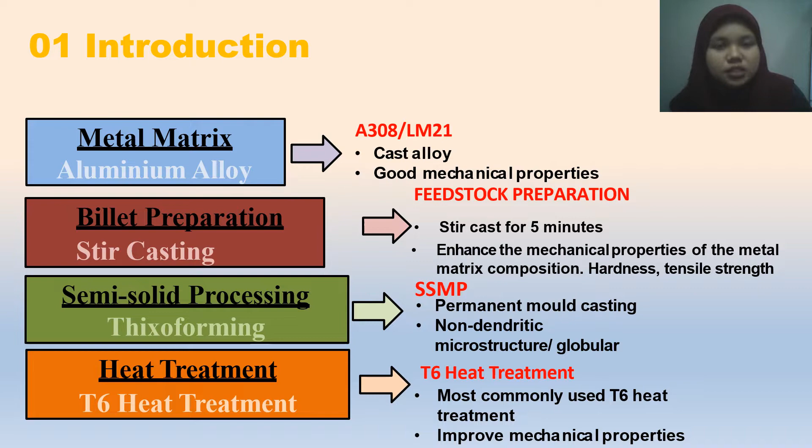There are three objectives for this project: firstly, to produce aluminium alloy for thixoforming using partial remelting; then to investigate the microstructural evolution of aluminium alloy after partial remelting; and next to determine the mechanical properties of thixoformed aluminium alloy. The scopes of this project are the stir casting technique, then thixoforming to obtain a non-dendritic microstructure, then T6 heat treatment, then microstructural analysis using a scanning electron microscope, and mechanical properties using Vickers hardness and a universal tensile machine.

The problem statements of this project are: less previous research on A308 because it is not a famous type for industrial use. Next, thixoforming is a relatively time-consuming and high energy process. And last but not least, the effect of T6 heat treatment on the aluminium matrix when it has undergone the thixoforming process.

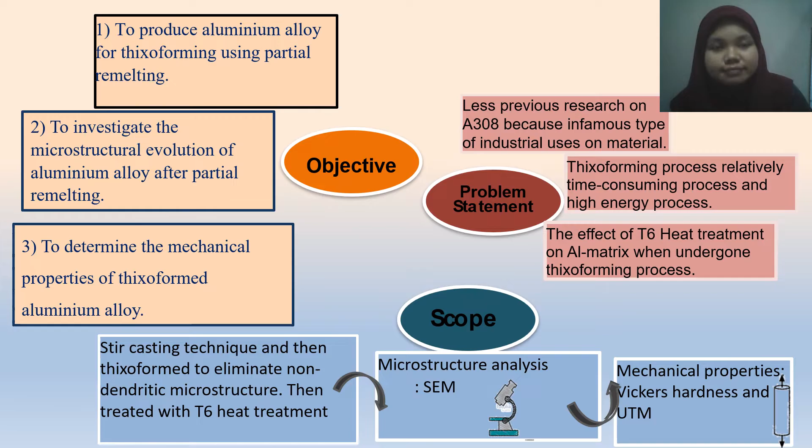For the review, A308 aluminium alloy was taken as an experimental alloy due to its availability and better castability. The A308 alloy has not been commercialized yet due to a lack of improvement in the mechanical properties. However, an effort has been made to control the microstructure along with improvement in metallurgical, physical and mechanical properties of A308 alloy by using horizontal mold vibration for automotive components. This was extracted from Patel et al.

2014. Next, stir casting is a method where reinforcement particulate is blended homogeneously into the aluminium matrix by mechanical stirring at high rotational speeds. After that, the molten metal is directly transferred to a shaped mold for solidification. Thixoforming improves the mechanical properties of A308, especially the yield strength and tensile elongation compared to permanent mold casting. Hardness increased due to extremely low porosity and fine size of the alpha aluminium grain throughout the sample. The ultimate tensile strength of the thixoformed T6 part increased by 22% over thixoformed parts and 41.9% over as-cast A308 alloy. This was extracted from Sharma et al. 2017.

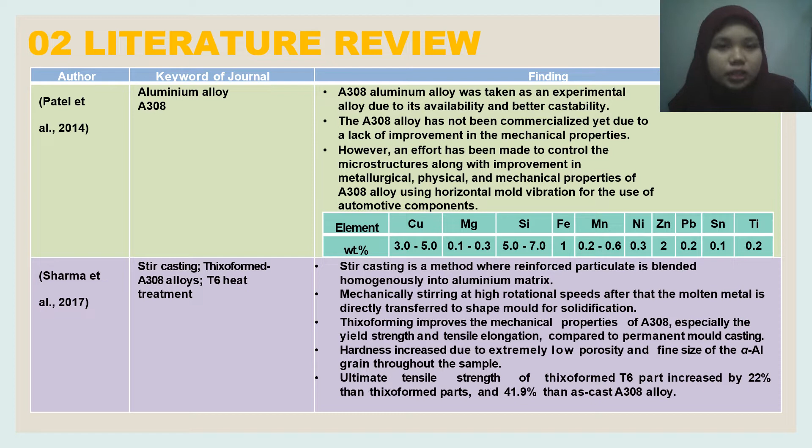Semi-solid metal processing. The key element in SSMP is the globular microstructure rather than dendritic microstructure, and the thixotropic behavior of the semi-solid slurry, which reduces segregation and porosity in the castings. Compared with conventional techniques, SSMP provides advantages like higher product quality, lower forming temperature, higher production rate, and improvement of mechanical properties through microstructural refinement. Thixoforming is one of the SSMP routes, based on the thixotropic behavior of alloys with non-dendritic microstructure in the semi-solid state, rather than the rheocasting route.

Moreover, thixoforming and related SSMP methods require thixotropic feedstock materials as starting material, and the figure shows a schematic illustration of A, the rheocasting process, and B, thixoforming processes. This was extracted from Mandal et al. 2014.

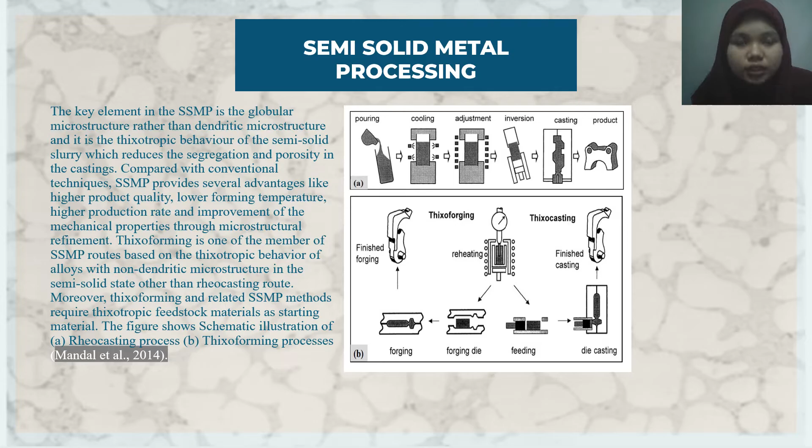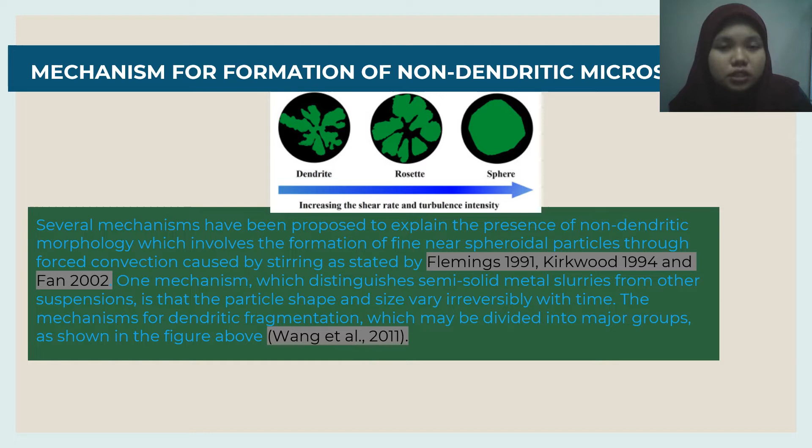Mechanism for formation of non-dendritic microstructure. Several mechanisms have been proposed to explain the non-dendritic morphology, which involves the formation of fine near-spheroidal particles through forced convection caused by stirring, as stated by Flemings 1991, Kirkwood 1994, and Fan 2002. One feature which distinguishes semi-solid metal slurries from other suspensions is that the particle shape and size vary irreversibly with time. The mechanisms for dendrite fragmentation, which may be divided into major groups, are shown in the figure above, extracted from Wang et al. 2011.

For the design of experiment, I made a total of 10 billets by stir casting. For every cook, 400 grams of ingot was used, and it must be heated until it reaches 700 degrees Celsius, the melting point of the aluminium alloy, and then poured directly into the mold. After reaching 10 billets, I went to the thixoforming process for my first objective, using 8 billets and leaving the other 2 billets for the as-cast samples.

For the thixoforming process, the billet length needed was 11 cm to fit in the coil induction, and the compression temperature was 502 degrees Celsius. During this process, I had to avoid the elephant foot situation happening to my specimen. After finishing 8 thixoformed billets, I divided the samples into 2: 4 samples for thixoformed and the other 4 for the upcoming T6 heat treatment.

The T6 heat treatment process included 3 steps. Firstly, solution treatment, held at 540 degrees Celsius with 8 hours of holding time. Secondly, quenching: the sample is soaked in room temperature water for about 5 minutes. And lastly, it goes into the furnace again, called the aging process, held at 160 degrees Celsius for 4 hours holding time.

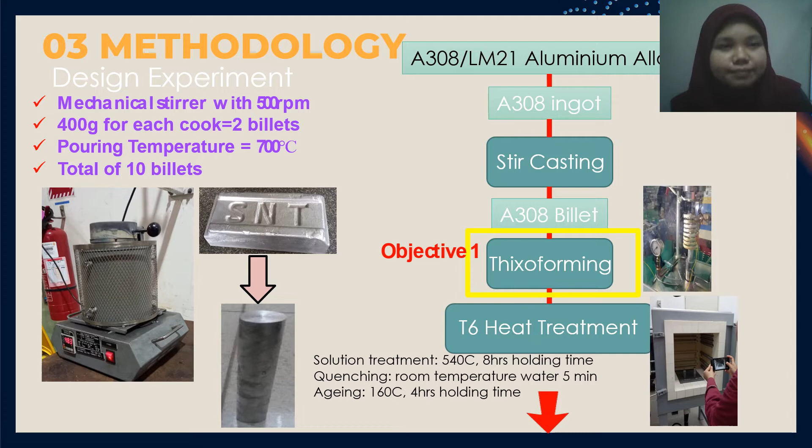And then for the microstructural investigation, SEM or scanning electron microscopy, as the second objective, was done by applying 150 times magnification, and I observed the overall morphological state of the as-cast, the THIXOFORMED and the THIXOFORMED heat-treated samples. Next, for the mechanical testing, I used tensile testing with the UTM, Universal Testing Machine, and the samples were first prepared using the CNC turning machine to ASTM E8M standards, and also Vickers hardness using the ASTM E384 standard, which was my third objective.

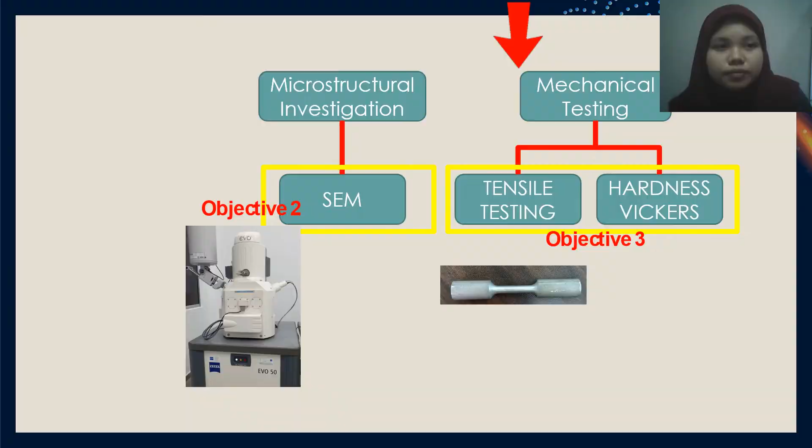So from here, for the microstructural analysis, the SEM is used to identify different phases of the sample or microstructural evolution. For the mechanical testing, the hardness test, I used the Vickers hardness test with the ASTM E384 standard. And for the tensile test, I used the UTM with the ASTM E8M standard.

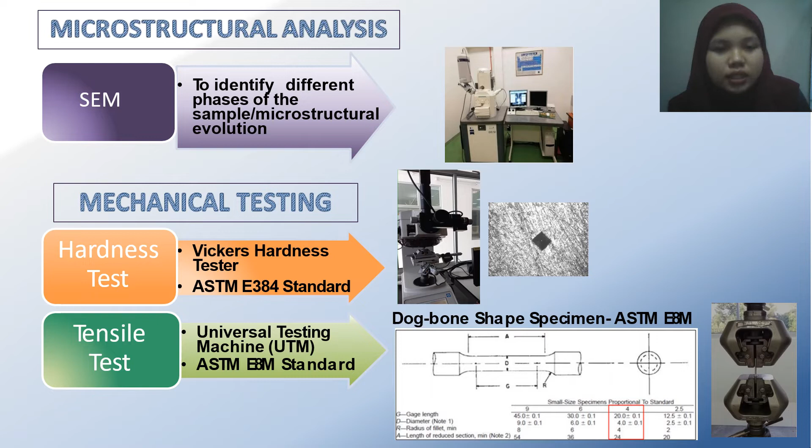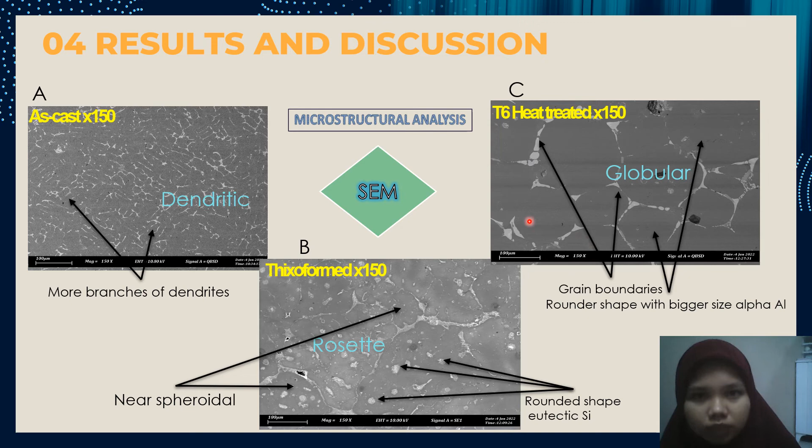And the near spheroidal alpha aluminium phase that appears in figure B in the THIXOFORMED process shows that this process is better than the conventional forming process. For figure C, the short T6 heat treatment affected the eutectic silicon morphology, and the eutectic silicon particles spheroidized, acquiring a more rounded shape and increasing significantly in size.

So for the mechanical testing, for hardness testing, I used an indentation force of 1 kgf and a loading time of 10 seconds, for an overall total of 9 points, and these are the averages of 9 points for every sample: as cast, THIXOFORMED, and short T6 heat treatment. From the table above, we can see that the trend line is increasing, and the increased hardness of the THIXOFORMED sample after T6 heat treatment was due to the extremely low porosity, and the size of alpha aluminium grains throughout the sample has increased, as we saw in the microstructural evolution.

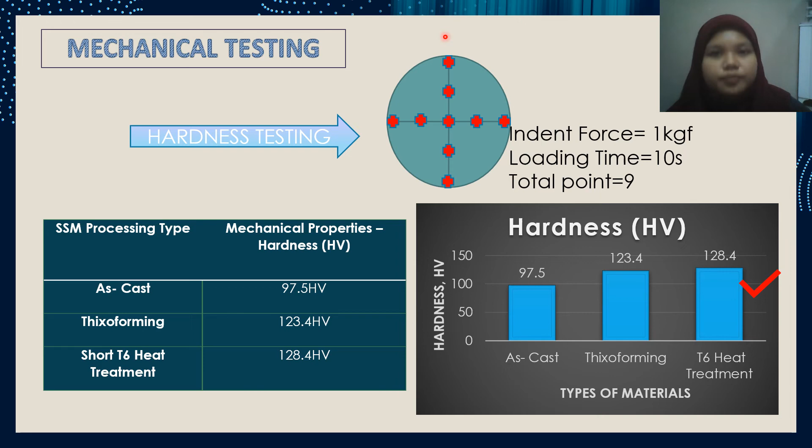So we can say that the increase in the measurement can be attributed to the precipitation of an intermetallic phase among the alpha aluminium globules in the alloys. The measurement shows an increase of 4.05% in hardness after the T6 heat treatment process.

Next, the tensile test: the ultimate tensile strength, the yield strength, and the elongation to fracture of as-cast, THIXOFORMED, and THIXOFORMED T6 are as follows. The trend line of these three results is also increasing, and THIXOFORMING is a well accepted method for enhancing the mechanical strength of thixotropic aluminium alloy by reducing or eliminating the porosity defect and enhancing chemical homogeneity. The results show significant improvement percentages of A308 aluminium alloy over as-cast.

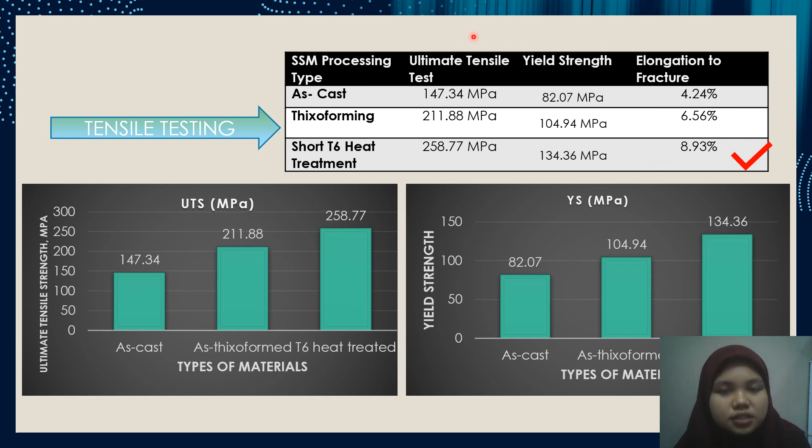However, the T6 heat treatment shows the highest results of all three for the UTS, YS, and elongation to fracture, as it attributes better ductility properties than the THIXOFORMED and the as-cast samples. Same as before, for the elongation to fracture, T6 heat treatment shows the highest value.

In conclusion, the THIXOFORMING process and T6 heat treatment eliminated the dendritic microstructure, and T6 heat treatment formed a globular microstructure. Secondly, the highest hardness was obtained from the T6 heat treated sample, and the highest ultimate tensile strength was also from the T6 heat treated sample. Thirdly, the morphology properties of THIXOFORMED significantly improve after T6 heat treatment, and T6 heat treatment leads to the best results in morphological properties as well as mechanical analysis.

As an improvement, to increase the mechanical properties and morphological structure, it is recommended to add reinforcement elements in the materials.